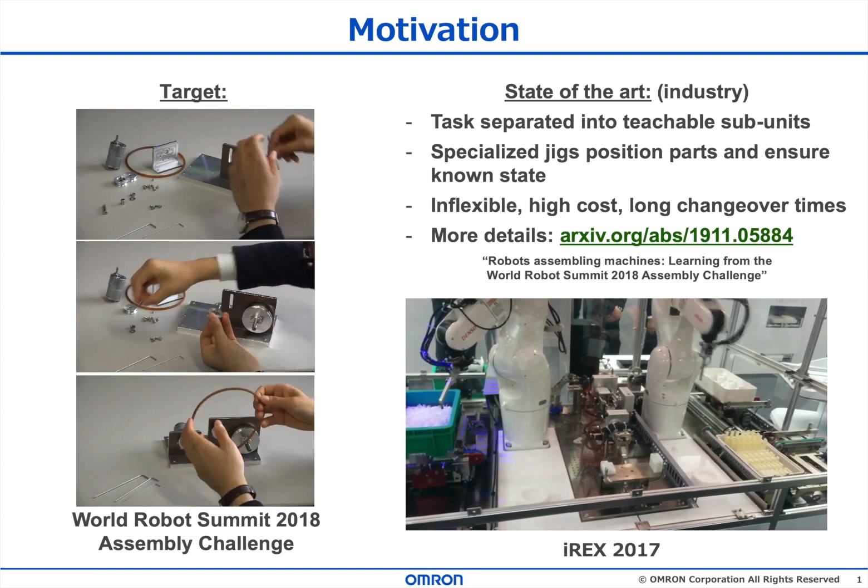Now, in the video on the right, we see that a lot of effort goes into the precise positioning of the grasped object. In general, the position of the object is not known precisely after it is grasped. Because of camera noise, the position of the robot, and many other factors, this is generally unavoidable.

However, we want to know the position of the grasped object as precisely as we can, because even small offsets can cause a task to fail. The object may be dropped by the gripper, it might get stuck, or the robot may enter a protective stop.

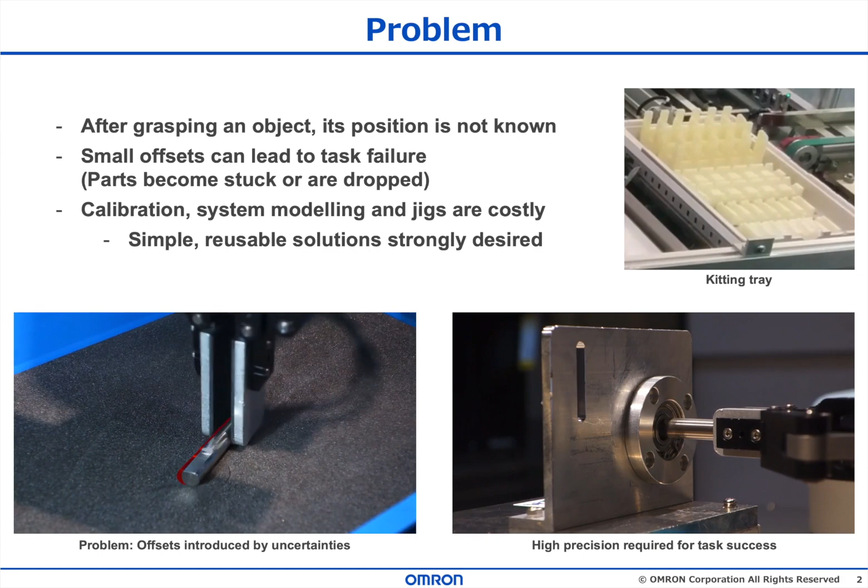This is why we want a method that can determine the position of the object with very high precision without any specially manufactured jigs. Concretely, we set the following objectives.

We want to be able to determine the pose of any object after it is grasped to sub-millimeter precision. We do not want to regrasp, and we want to minimize the amount of calibration that the end user needs to perform.

We have found that reducing the complexity is very important for robot developers and operators, so we attempted to make the procedure as simple and generic as possible.

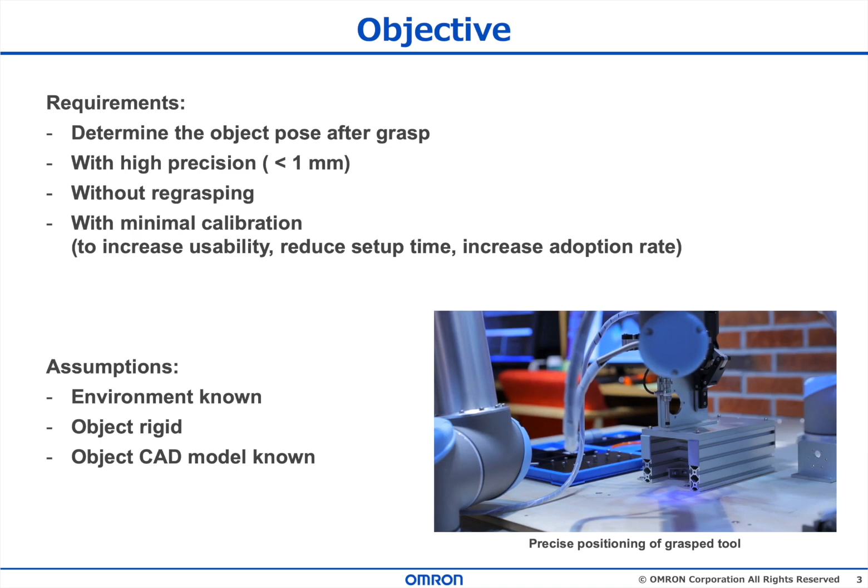Furthermore, we assume that the environment of the robot is known, and that the object model is known as well. We also assume that the object is rigid and does not change its position significantly once it is grasped.

The main idea in our proposal is that we can use interactions with the environment to obtain information about the object's pose in the gripper.

If we touch a surface with the object while we detect its contact, we limit the possible positions of the grasped object, and by repeating this process in different orientations, we can get a very good idea of where the object is.

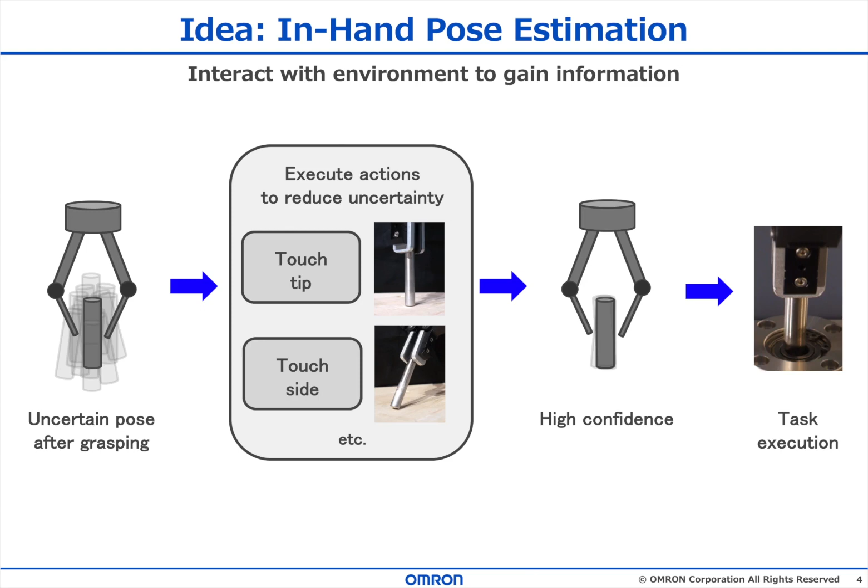It should be easy to see the human intuition behind this approach, and one can also imagine that different actions can be used, such as looking with a camera. In this paper, we chose touching for its simplicity and ease of implementation.

On the left part of the slide, you see that we start with a belief about the position of the object, which is a rough idea with some uncertainty. From this belief, we draw a number of particles.

Each particle represents a possible position of the grasped object in the robot's wrist frame. When the robot senses that the object has touched a surface, we check the distance of each of the particles from the surface it is colliding with.

We discard particles that are either too far away from the surface, since we detected that there is a contact, and we also discard those that penetrate too far into the surface. Only those particles which are just touching the surface remain as valid particles.

We use those remaining valid particles to build a new belief about the position of the object, which is now more accurate. We know the position of the surface because we assume that it is known. But even if we were not sure about the position, we could easily obtain it by simply touching the surface with the robot.

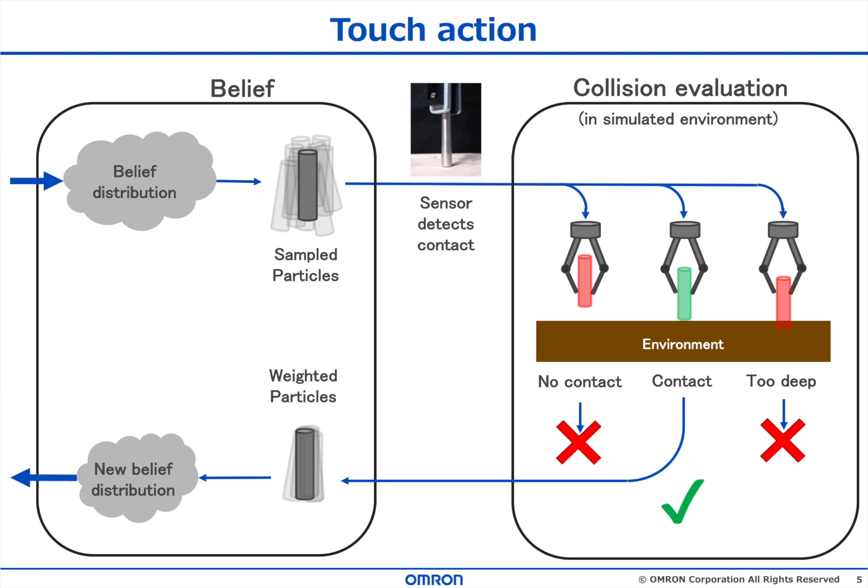To summarize our approach, the object pose in the gripper frame is the state which we want to estimate. We represent this as the 6D pose of our object mesh plus an uncertainty in the form of a normal distribution. You can consider this the probability of the object being at any given pose.

To reduce the uncertainty and to improve our belief about the system state, we propose to use touch actions. These actions allow us to gain information about the system state by using the knowledge that we already have about the environment and the fact that there is a collision.

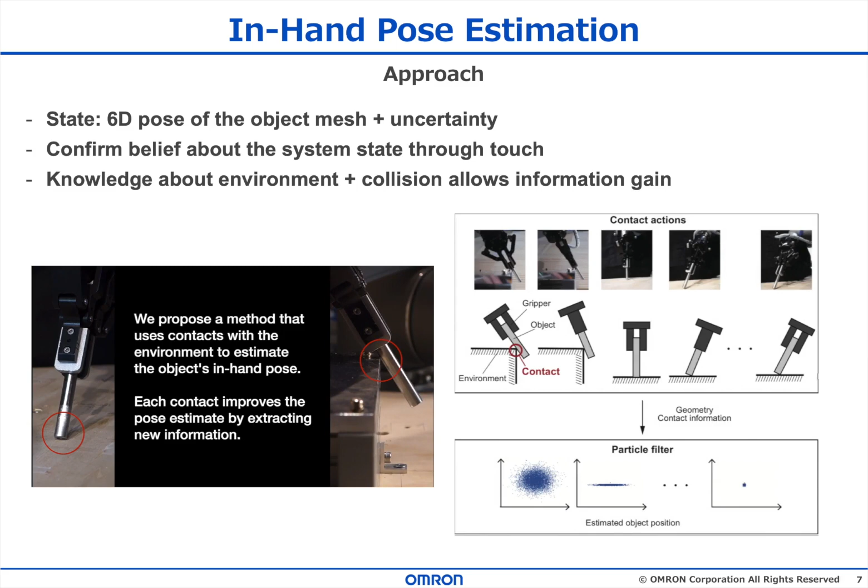For the mathematical details, we refer you to our paper, but some explanation is useful to motivate why we chose this representation. In Bayesian terms, we can use the following description. The pose of the object xT is represented as a normal distribution around a 6-dimensional vector, which represents the probability of the object being at the estimated pose.

The posterior probability, given a certain number of observations yt and ct, the collision state and the position of the robot wrist, gives us the estimate of the pose after taking the actions. This is given by the first equation. Because we do not have a way to connect this probability to the collision world directly, we use the particles to approximate the posterior probability, as shown in the second equation.

We note that we could have chosen a pure particle filter solution, but this representation has advantages. First, it is compact and does not depend on the number of particles used. Second, it is independent of the modality used and can be used efficiently with some of them, for example with vision. Third, it gives us a direct measure of uncertainty or potential information gain, which can then be used for reasoning and planning.

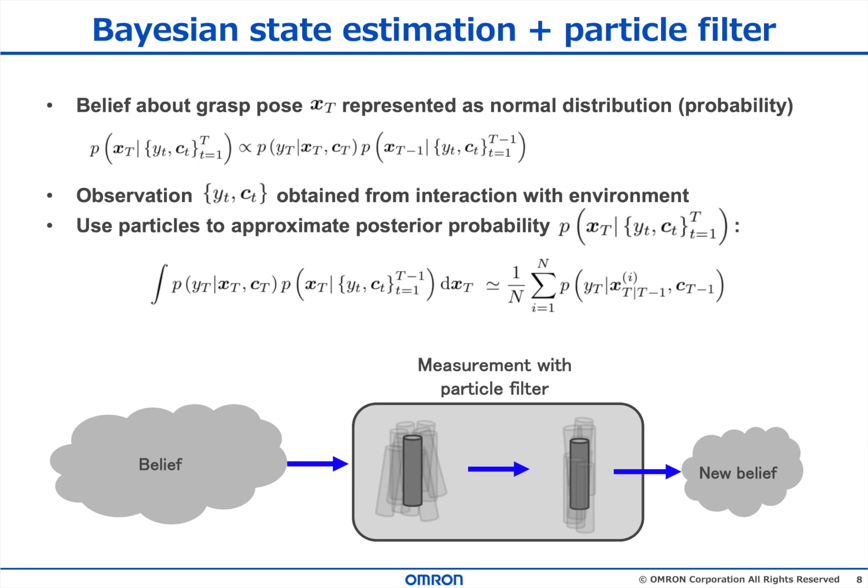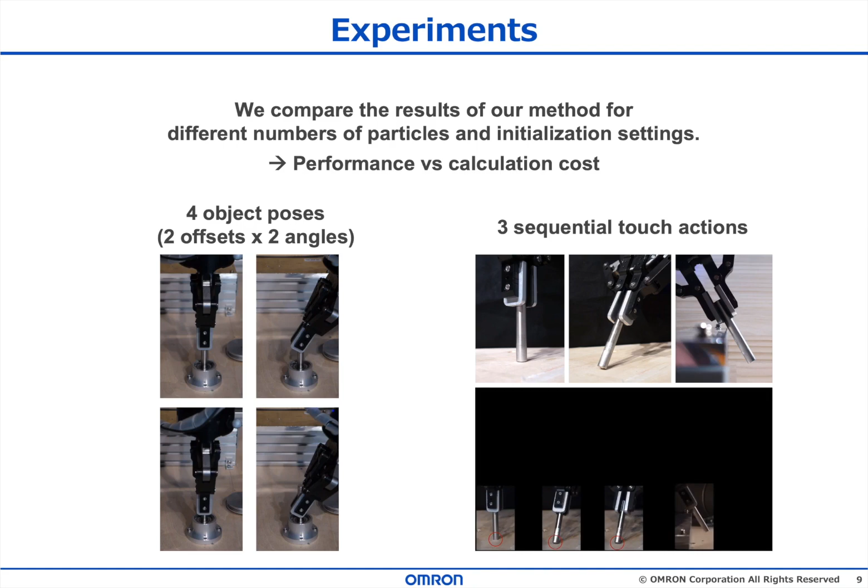We did not evaluate the calculation cost quantitatively, since it is overall very low. Modern collision checking is very fast and parallelizable, and the scene that we evaluate is not complex. Our code takes only a few seconds to run without any optimization, and should be easily optimizable to work in less than a second.

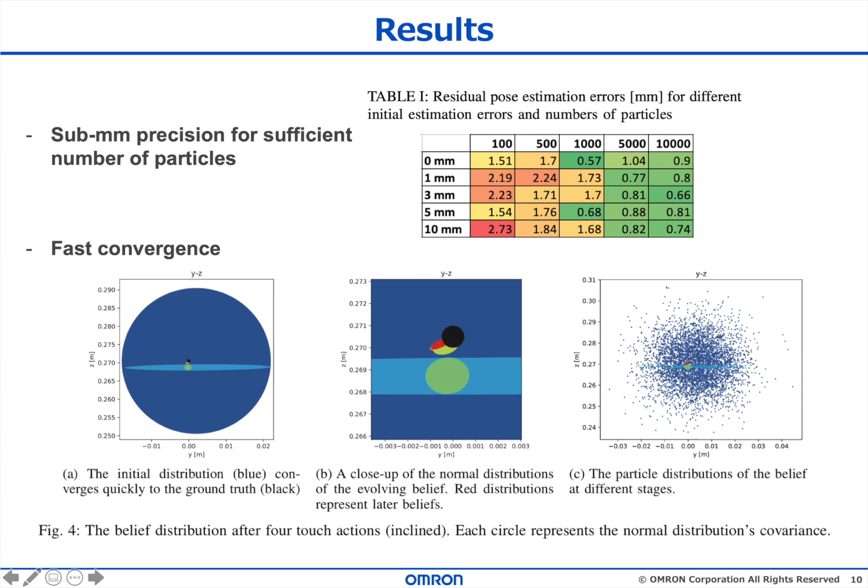Now, these results are good, but there are some things that we need to note. One is that the precision of the method fundamentally relies on the quality of the calibration of the collision surface. The position of the surface has to be known with very high precision for the method to work well. However, as we mentioned before, it is very easy to obtain it, even while the robot is running. You simply touch the surface with the robot and record the position, and no external measurement tools are needed for this.

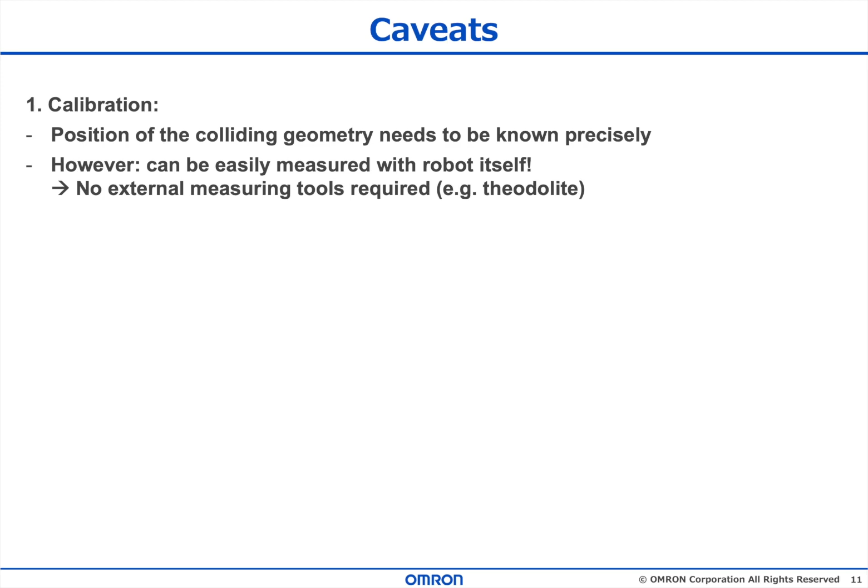Second, the belief state representation as a 6D vector has limitations, mainly that rotations always happen around the object's origin, which may not always be what is desired. Solving this is part of the future work, and may be tackled either with a discontinuous distribution or by extending the belief state to allow a different center of rotation.

Third, symmetry has an effect on the results. It should be obvious that we cannot obtain the rotation around the cylinder's axis, but more than that, if the rotation around the other axis is left unconstrained, particles can also end up flipped, which affects the result negatively.

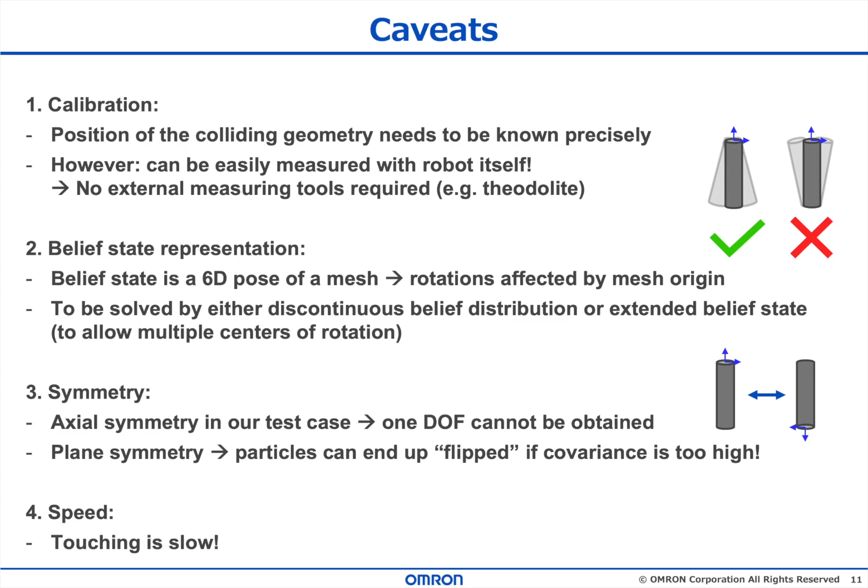Last, touching a surface safely is quite slow in practice, and it takes at least 10 seconds. This is too long for industrial practice where cycle times need to be fast, so this is also part of our future work.

In conclusion, we proposed a simple method for in-hand pose estimation, which allows us to estimate the object position after grasping to sub-millimeter precision. It works for any gripper and any rigid object, and it has very few requirements. You can use it with nothing but an object mesh and a way to detect collision, which any robot with force sensing can do. No calibration tools are required, and a single surface is enough to perform the method. No other modeling of the robot, or the gripper, or the environment is needed to use our method, and we would like to repeat that this simplicity is one of the strong points of our proposal.

In future work, we want to make this method multimodal, so that we can use both touch actions and looking with a camera, for example. We hope to make our prototype available as a ROS package as well. Thank you for watching.